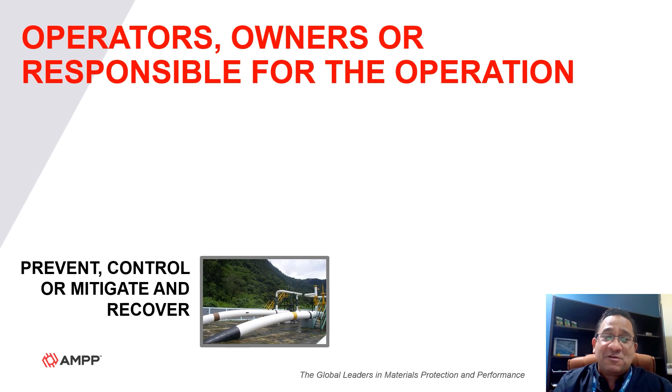I always like to start talking about the main objective of the operators, owners, or those responsible for pipelines, which is to have a safe and profitable operation, which means prevent, control, and mitigate the negative impact to production, reputation, environment, and people.

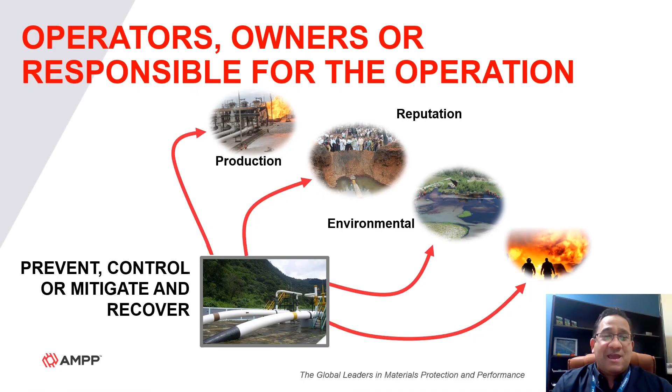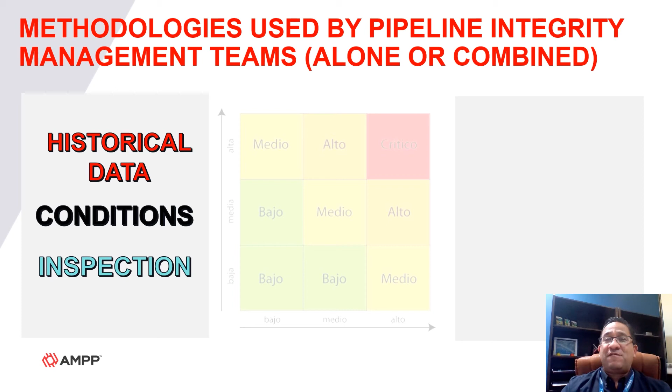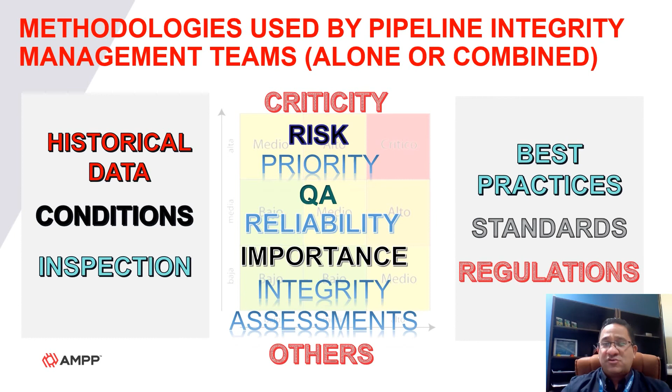Many operators have implemented different methodologies using historical and up-to-date information from different sources, which is then evaluated and analyzed by applying deterministic and/or probabilistic methods, isolated or combined, supported by the best practices, international standards, and the requirements set up in the regulation.

Despite all the effort made, our assets continue failing for different reasons or threats, and we are constantly looking for new ways to avoid them. Our strategy focuses on mitigating and recovering from these failures as they occur. Hence, the Pipeline Integrity Management System has chosen to use risk as the main driver to direct the effort and resources on either the probability and/or the consequence of any failure.

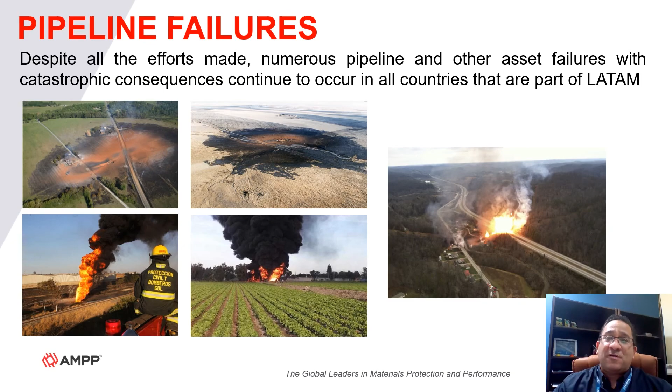So, the question is, when do we need to make a risk assessment? And the answer is through the whole asset life cycle. Because when we do research or an investigation of a failure, we have found that the root cause of the failure may be in the organization, in the design phase, construction phase, or operation and maintenance phase. And additionally, we have to consider that many of our assets are already operating beyond their design life.

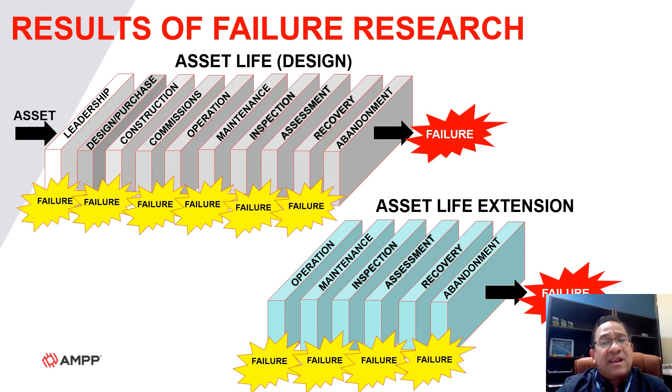What should we do when we are interested in having a formal integrity management system in our organization? First, we must perform a gap analysis or a diagnosis of the system that allows us to identify where we are and what we need to do to reach our goal or our target. For example, zero failures, prevent negative impact on production, protect the people, and then we should start with the development stage of our tailor-made suit, since not everything that works for another operator has to work for me.

In this stage, we develop the main manual for the system, procedures, formats, and we can even create the potential structure of the organization responsible to handle the integrity management system. After this, we can start with the implementation stage, which after some time we can review through an internal review using our own organization, our people, or an external review like a formal audit process using an external company or maybe the regulator, that allows us to identify improvement areas in the system.

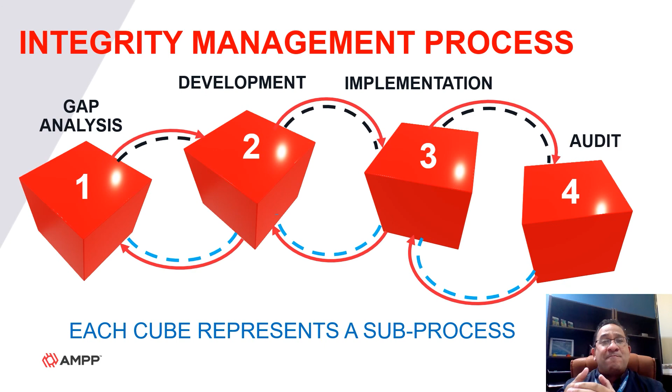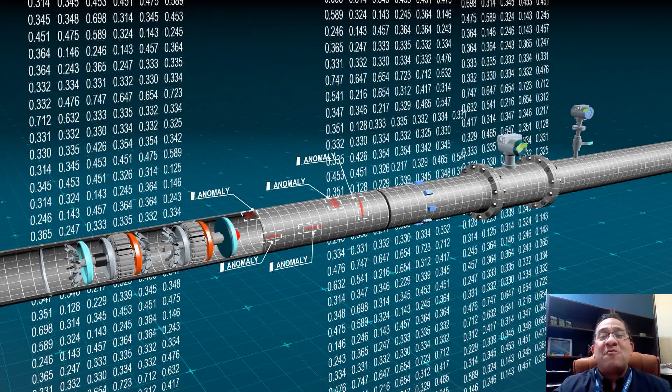For example, let's imagine that we have a pipeline with several in-line inspections, instrumentation generating data on a daily basis, cathodic protection assessment results, and other data. These present a challenge to manage and use to make an analysis that considers the interrelationship of all information available and how we can use it to assist in better decision making. Hence, data management using online applications on digital platforms is becoming more relevant now and in the future.